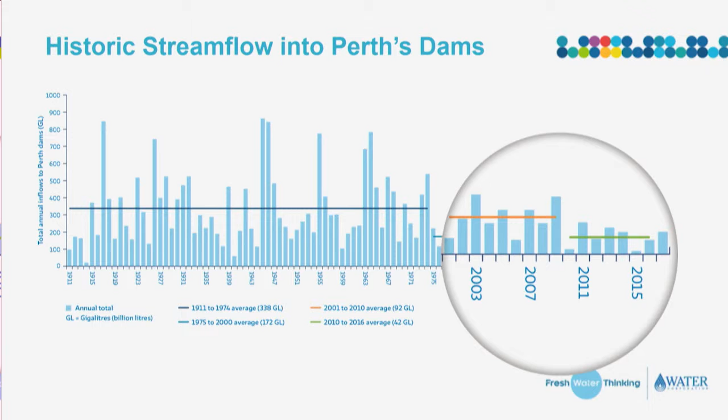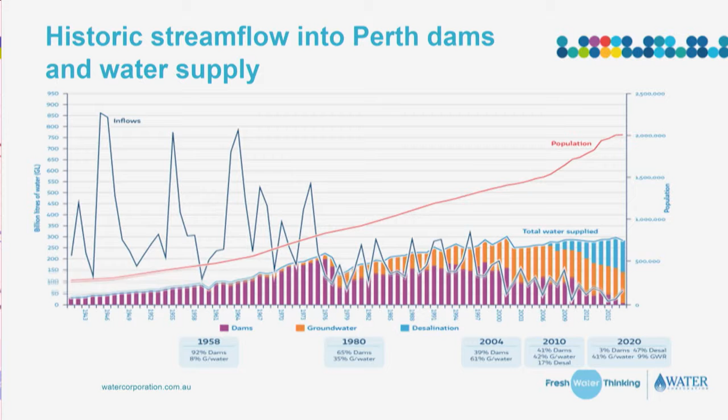So in about 1958, it was about 90% dams, 10% groundwater. 1980s, it's then 65% dams, about 35% groundwater. 2004, it had switched, so we had about 60% groundwater and 39% dams. 2010, we had about 17% desal coming into that mix as well. Our plan in 2020 is to have 9% included in the groundwater replenishment.

So how did we get to here? Water Corporation created a document called Water Forever, Whatever the Weather. So this helps in reducing water use, developing new sources and increasing water recycling. And it's all for us to have a climate resilient water supply.

So why have we chosen groundwater replenishment? GWR could deliver up to 28 billion litres of water, and that's enough to supply 100,000 Perth households. And so we're hoping by 2060, GWR could be 20% of Perth's drinking water supply.

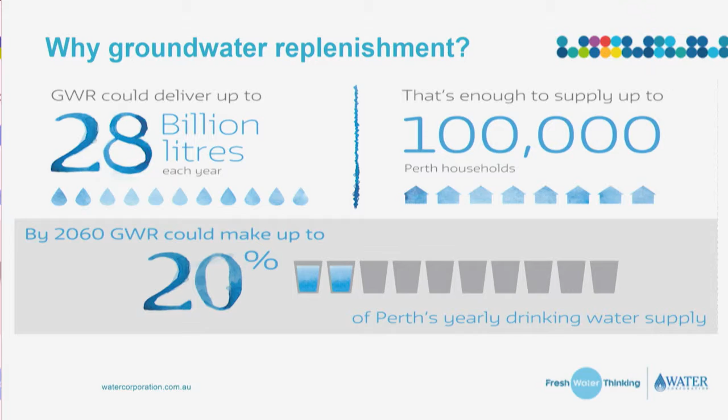So just to give you some key dates on the scheme, we actually began engagement in 2004. In 2006, we undertook wastewater characterisation because we didn't actually know exactly what was in our wastewater catchments at that time. So we were involved in the Premier's Collaborative Research Program from 2006 to 2008. So that was also with the Department of Health, CSIRO, Curtin University, etc. It was a really big project.

We made an interagency working group, which at the time was DEC, Department of Water, Department of Health, and we also started characterising our aquifer on the Beenyup scheme. 2008 we did some baseline groundwater sampling. 2009 we commissioned the advanced water recycling plant for the trial plant. 2010 we commenced recharge of the trial plant and we launched our visitor centre. 2012 we completed the trial.

2013 we actually were able to continue to use that trial plant. Department of Health gave us approval to continue to use it, and we actually had a final groundwater replenishment trial report and government decision. 2014 we decommissioned the GWRT plant and started constructing stage 1. 2016 spent a lot of time commissioning stage 1 and commenced the bore field commissioning, and we also had the announcement of stage 2.

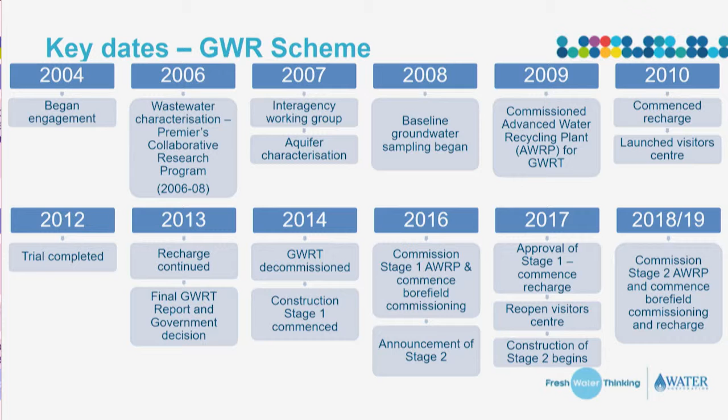2017 we got approval for stage 1. We reopened our new visitor centre and we started constructing stage 2. 2018-19 we are still constructing stage 2. Going into early next year is when we will start commissioning the plant. So I just want to emphasise this whole process has taken us at least 15 years.

We have had people from Cape Town come over and ask us how long it took, because he had 3 months. And I told him it's taken 15 years, so good luck, buddy.

So just to re-emphasise why we did the trial, the objectives were: is it technically feasible? So the treatment process we wanted to use, we wanted to know whether or not we could use them. We also needed to develop policy and regulation, and we also had to have the community on board, because there's no point spending so many millions of dollars if the community doesn't want to come along.

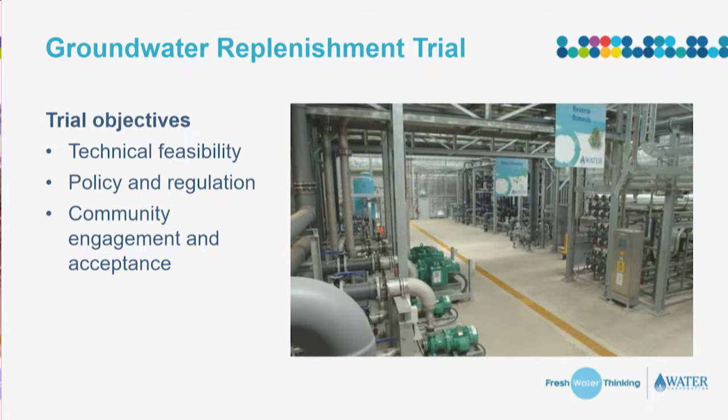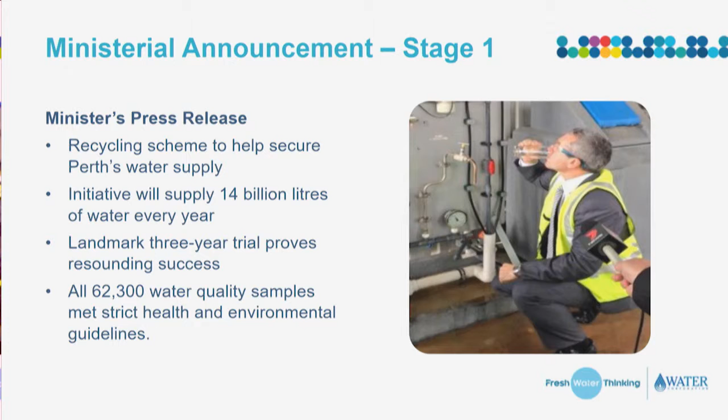So the ministerial announcement on stage 1, so the then water minister at the time basically took a swig of water, not at the final compliance point, but close to the final compliance point, but yeah, that's what happens when the media gets involved. So basically his press release was that we would do 14 billion litres, and basically our 3-year trial was a resounding success, and all 62,300 water quality samples met strict health and environmental guidelines.

So just to give you a rundown on the treatment process, I could stand up here for hours, but come and find me later. So we actually have a number of critical control points, which are just like checkpoints throughout the system. If the water hasn't met specifications, it goes straight into the ocean outfall, so we don't allow it to go to the next point. So we have 2 critical control points from the wastewater treatment plant before it comes up to a storage tank. So the wastewater flow into the plant is not consistent every 24 hours, so we actually have to balance the water storage. We then have 3 critical control points at the ultrafiltration process, 3 critical control points at the reverse osmosis process.

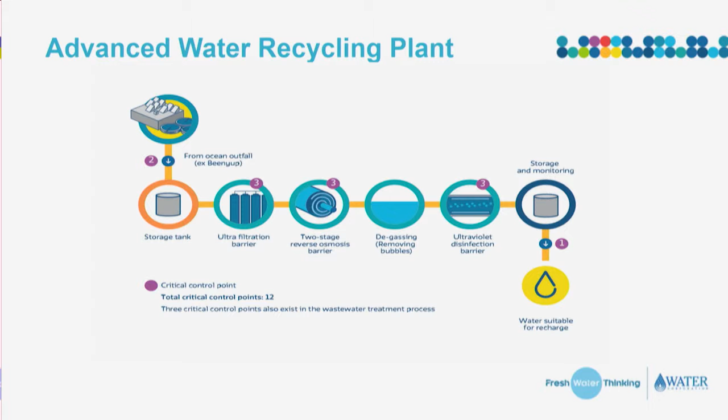Water coming out of the RO is about pH 5.5. We have to get it up to about 7 before we can recharge. Quickest way to do that is to degas the water and convert the carbon dioxide to calcium carbonate or alkalinity. We then have 3 critical control points at the UV. We then dose a little bit of caustic to get it up to 7 at that point. We then have our final storage point before it is then suitable for recharge.

Part of my work that I do out there is to make sure that all of these critical control points are in compliance all the time. Department of Health also get the trends of these each week for every month and sign off at the end of each month.

So how do we do a lot of the sampling? We have 166 recycled water quality parameters that we have to measure. Instead of doing them all the time, what we do is we have 17 recycled water quality indicators, and we sample them more frequently than we do the whole 166. So basically each of these indicators represents a different group, and if that indicator flags, it means all the chemicals that it's representing under it, we would then go and test from there.

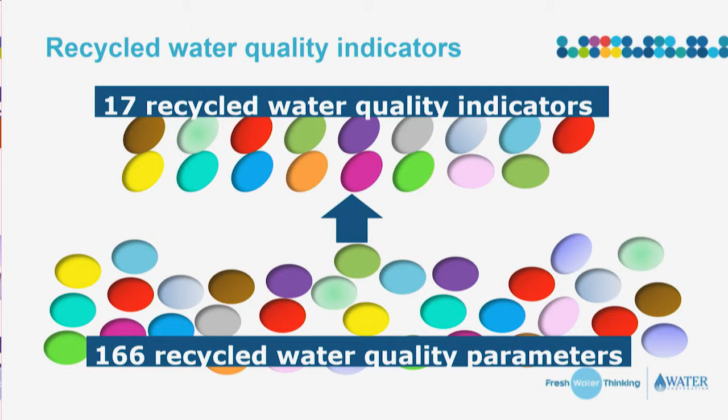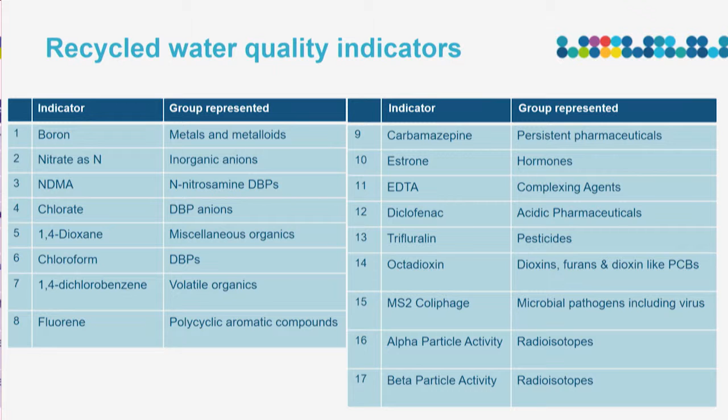So just to give you a rundown on what our indicators are, we have metals, inorganic anions, disinfection byproducts, nitrosamines, miscellaneous organics, pharmaceuticals, pesticides, dioxins, so a whole plethora, because we can't actually go and measure all the millions of chemicals that are out there. So we've taken this approach with Department of Health, which is similar to what they do in Orange County over in America as well.

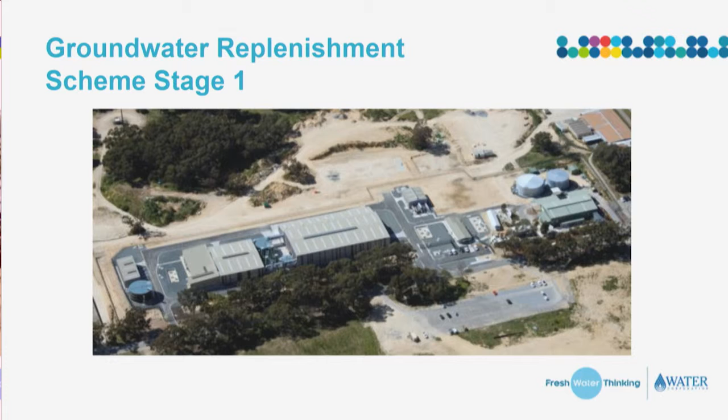There was about 450,000 man hours spent on the project, and we procured equipment both locally and from around the world to ensure that we got the best technology that was going to meet our process requirements. Some interesting things for those of you that like construction. There was 2,700 cubic metres of earthworks undertaken, including removing unsuitable material from previous sins of the past on the site. 1,000 cubic metres of concrete was poured.

There was 15 kilometres of underground and above ground pipe work just within the buildings. And 70 kilometres of cabling as well was installed. So there's quite a lot of equipment in those small buildings, and quite a lot of effort goes into actually putting them in there.

So just some other sort of facts. So what we had to build was a new feedwater pump station that took the water from the wastewater treatment plant up into the main plant. We also constructed a series of recharge bores. So what do we do? Three bores going into the Leederville aquifer, which is the shallower confined aquifer, and then also one into the deeper Yarragadee aquifer.

In the building we had UF/RO, a UF pump building, fine and coarse screens, recycled water pump building, and a chemical storage building constructed. Balancing tanks, recycled water tanks, and flush tanks as well.

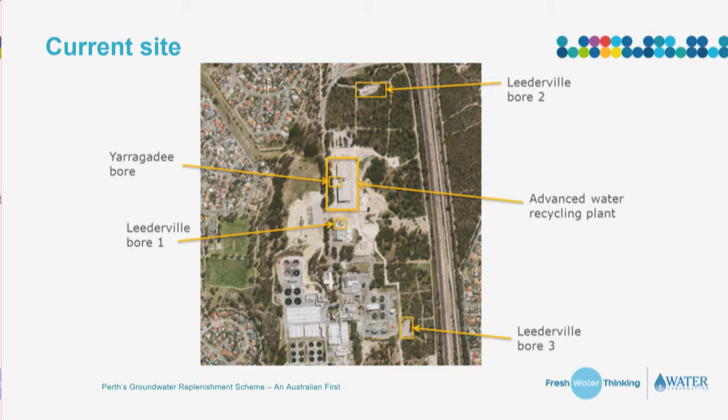So just a little bit about the timeline from a construction point of view. So once the Groundwater Replenishment Scheme full scale was announced in 2013, we then went on to a procurement process, which was a competitive alliance between two bidders. During 2014-2015, the GWRT was closed, so that meant the end of the trial period, and we were starting to focus on the full scale.

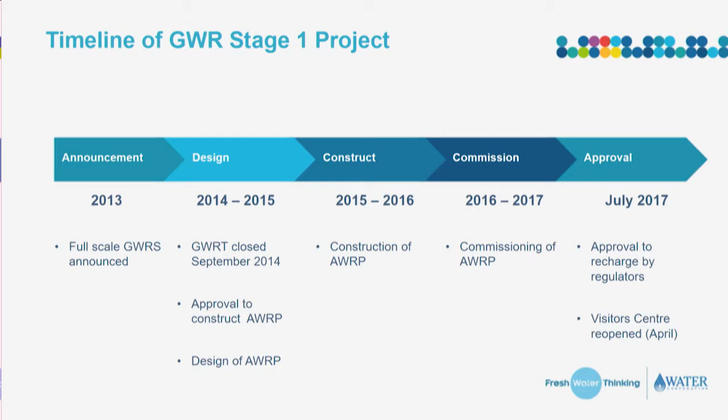Then during 2016-2017 we started commissioning, and then in July 2017 Department of Health gave us approval to recharge. So that was a fairly significant milestone for the project, and it was one that definitely couldn't have been achieved without all of our different partners that were involved during the construction and commissioning phase.

So a couple of things, what makes a project like this successful? So we had to achieve a number of targets during the trial, and we also had to ensure that was continued on during the construction phase and also during commissioning of the main plant. Without any of these elements, we wouldn't have succeeded, and that's what makes this project so important and such a cornerstone. So we had to prove the technical feasibility. We had to prove that what we had designed was going to work and that it was going to produce water to a quality that was safe for people to eventually drink.

And we had to get through policy and regulation. So it was really, really important that we brought our key stakeholders along. We couldn't have done this project without Department of Health. We couldn't have done it without Department of Water, and we couldn't have done it without all our other regulatory bodies actually stepping up and saying, hey, this is a great idea, we get on board. So if we didn't achieve that, we could have all gone home.

The other thing was community support. We had 14,000 people come through our visitor centre. We had thousands and thousands of individual meetings with various different government bodies, with agencies, with individuals, to talk about the science, to talk about why this was so important to Western Australia. And that was critical, and that was key to what makes this project so great.

And the most important thing is our regulator relationship. All our regulators stepped up, they all supported the idea, and they all got on board. And you know what? They all put some meat in the game. So if we don't have their support, we couldn't have done this. And this project is key, and it's pivotal to the future of Western Australia and the future of how we look at water across Australia. So we're setting the benchmark for the rest of Australia for what you can actually achieve in the water recycling space.